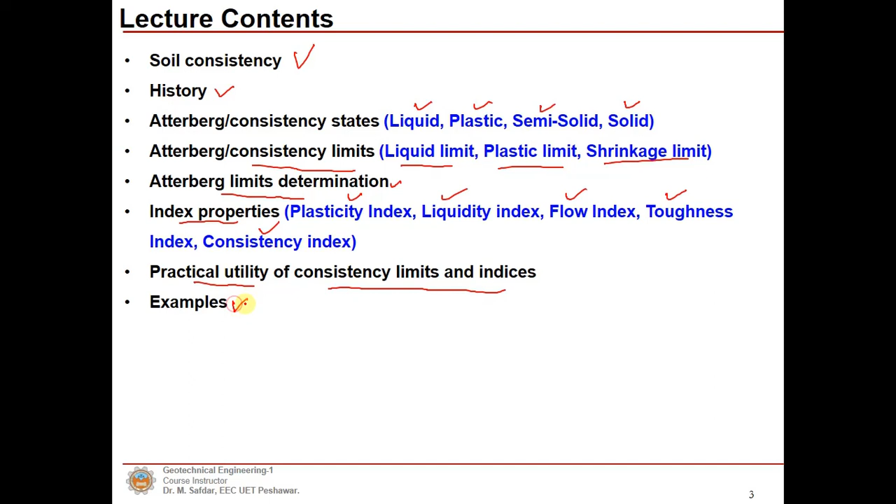We will also highlight the practical use or practical utility of those consistency limits and indices in civil engineering and in geotechnical engineering. We will solve problems and examples related to today's topic.

Now starting with the soil consistency. Soil consistency is the resistance to deformation or firmness. In simple words, we can say that a soil is very soft, firm, stiff, very stiff, or hard. Later on we will talk about the qualitative and quantitative determination of what is very soft, what is very stiff, soft, firm and hard.

We can qualitatively define these terms for fine grained soils, which is the property of soil consistency predominantly in clay soils or fine grained soils.

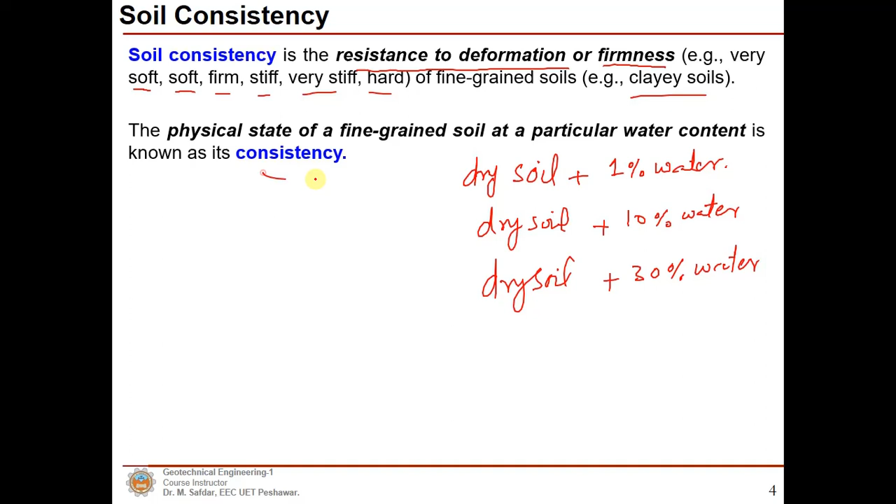Now this is the physical state of a fine grained soil at a particular water content. For example, if we have a dry soil and we add 1% of water, or if we have dry soil and we add 10% of water, or if we have dry soil and we add 30% of water, and so on, the physical state of that fine grained soil will change. That is known as consistency, and it will give plasticity to that fine grained soil as well.

Now depending upon the water content, a soil may appear in one of 4 states: liquid state, plastic state, semi-solid state and solid state.

Now if we draw the figure, on the x-axis we have the water content, and on the y-axis we have the volume. If we start from the dry soil, initially if we are changing the water content, we will reach a point that the soil will be saturated, and that limit will be known as the shrinkage limit, or SL.

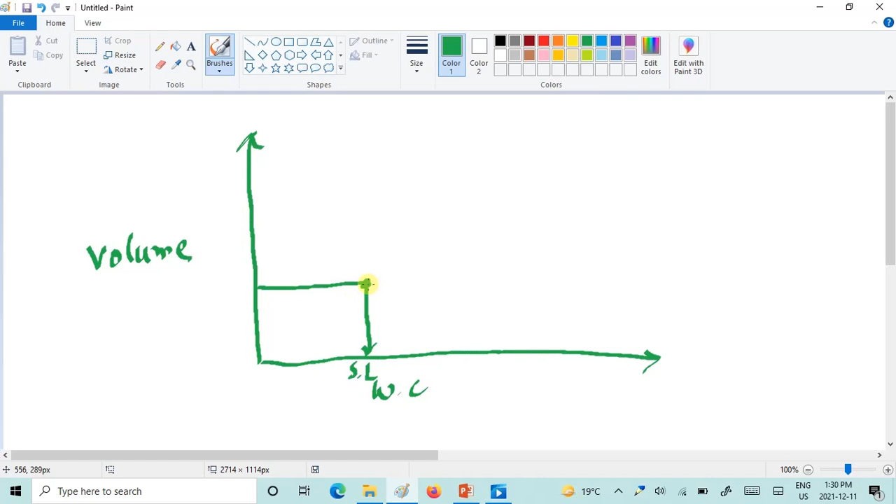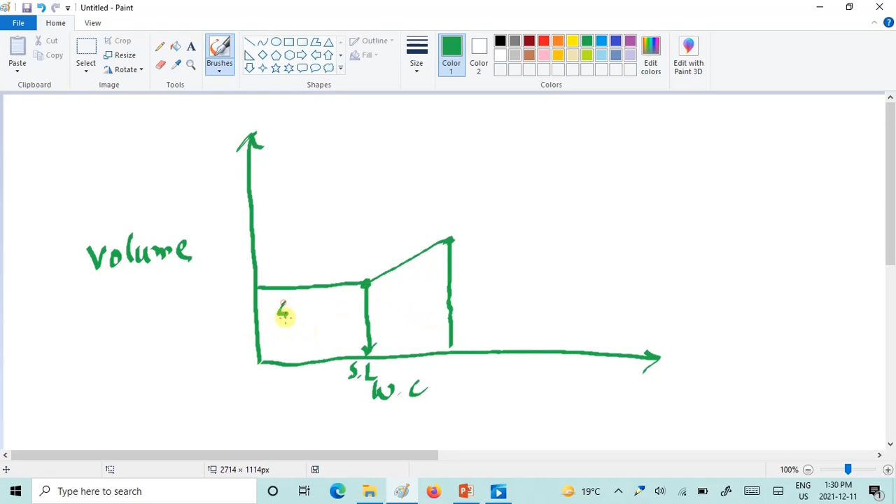Then if we increase the water content, we will reach a point - this is the solid state, this will be the semi-solid state. The soil will start to mold, and that is the start of the plastic state. This is the plastic limit. And then if you increase further water into the soil, it will behave as liquid, and this point will be known as the liquid limit.

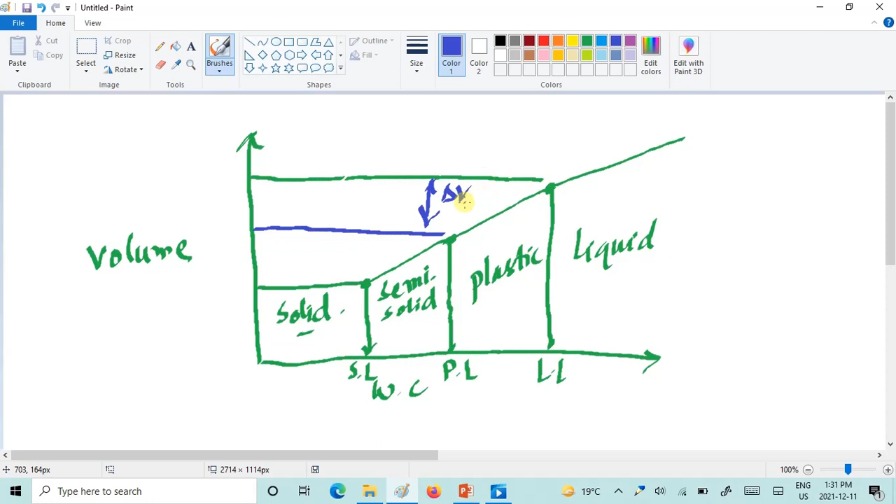Now you can see here that from this point till this point, volumetric changes are occurring, and that is due to the change in water content. So the water content is reduced from the liquid limit to the plastic limit, and the volumetric changes in that soil are occurring.

Again, the volumetric changes are occurring here as well, and that is due to the change in water content from the plastic limit to the shrinkage limit.

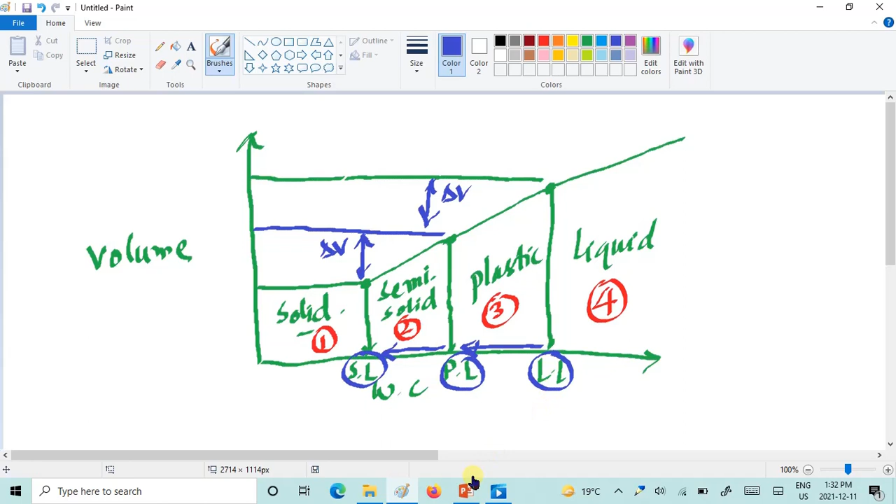So basically we have 4 consistency states and 3 consistency limits. Same explanation is provided here: solid, semi-solid, plastic and liquid states, and we have shrinkage limit, plastic limit and liquid limit.

Now in the plastic state, the soil can be molded without crumbling and rupturing. But if you're talking about the lower limit, at this particular water content, crumbling and rupturing will occur. In the middle there won't be any crumbling and rupturing of the soil. Here the soil will be kind of brittle.

Here the soil will behave plastically, and here the soil will be in liquid form. We can relate that to the strength, compressibility and permeability characteristics as well, but that will be discussed in greater detail in coming slides.

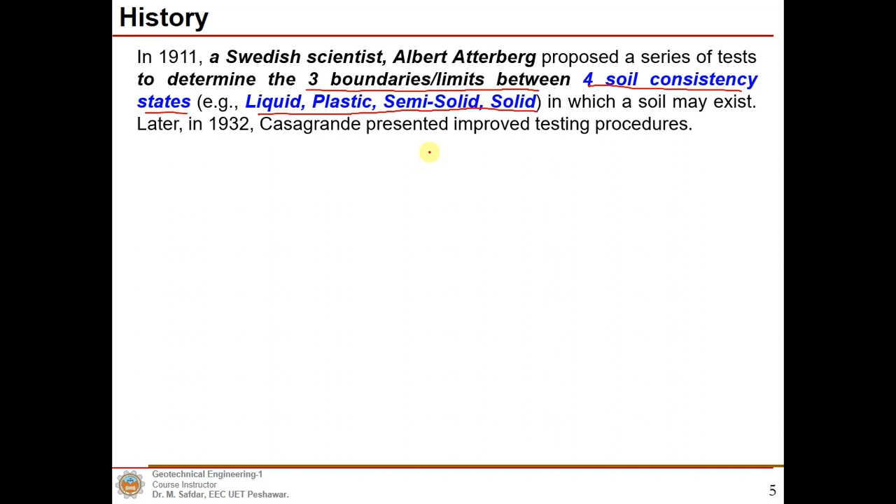Now in 1911, a Swedish scientist, Albert Atterberg, proposed a series of tests to determine the 3 boundaries, or limits, between the 4 consistency states - liquid, plastic, semi-solid and solid - in which a soil may exist. Later in 1932, Casagrande presented improved testing procedures, which will be discussed in the liquid limit determination procedures in greater detail.

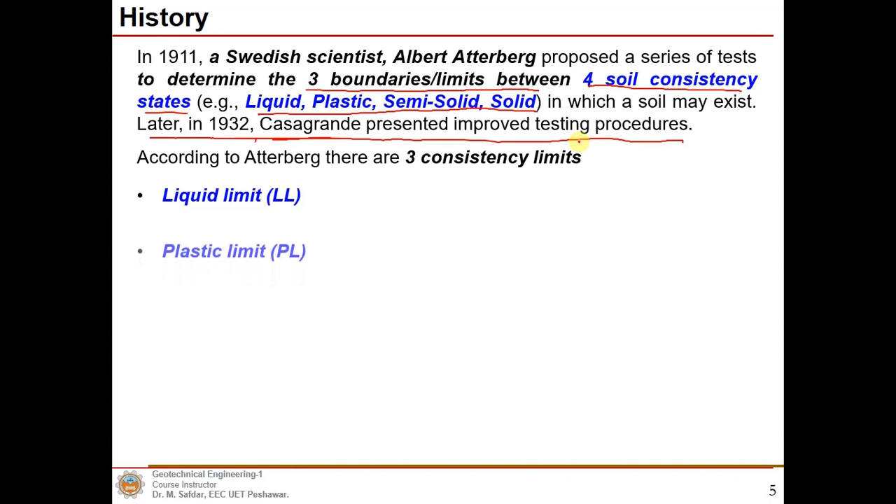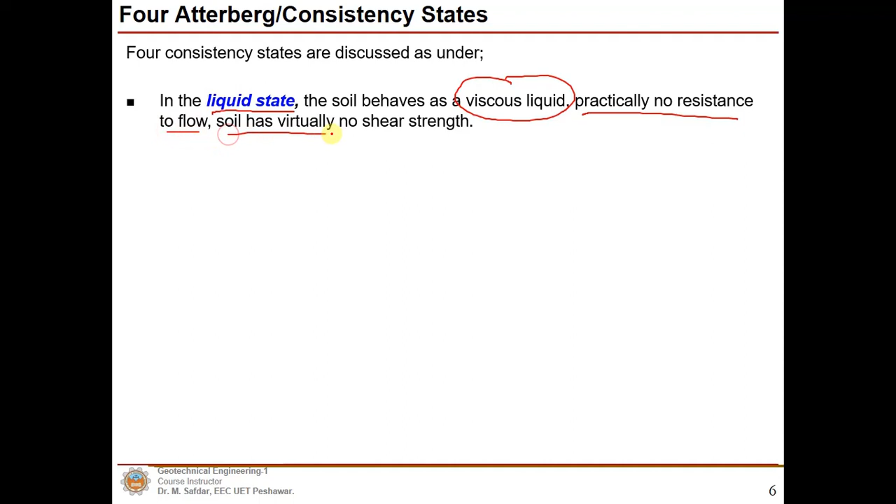Now, starting with the four consistency states, we will start with the liquid state. What are the properties of the liquid state? The soil will behave as a viscous liquid, having practically no resistance to flow, and the soil has virtually no shear strength.

In the plastic state, the soil can be molded or worked into a new shape without crumbling or rupturing. This is the stage when the soil changes from possessing practically no shear strength to having a limited shear strength. The soil water content has been reduced from the liquid state to the plastic state, and therefore the soil is gaining some strength in the plastic state.

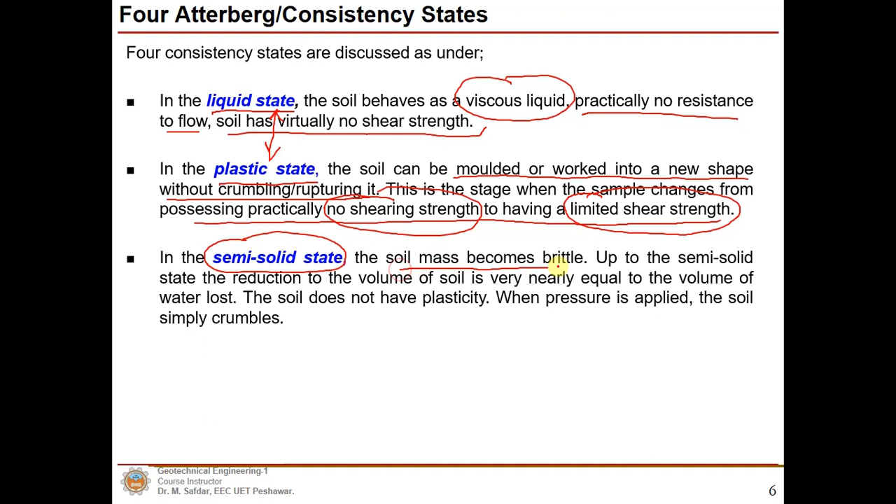Now, what should be the property of the semi-solid state? In the semi-solid state, the soil mass becomes brittle, and up to the semi-solid state, the reduction in volume of the soil is very nearly equal to the volume of water lost.

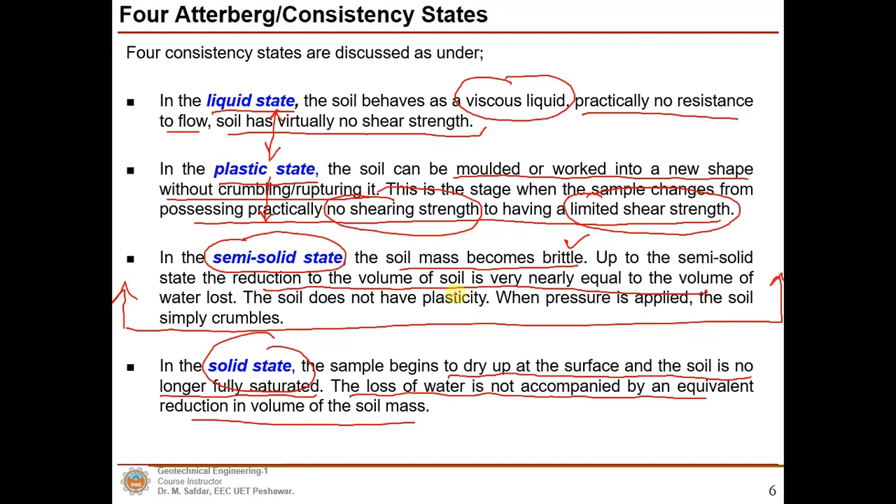The loss of water is not accompanied by volume reduction in the solid state, but till the semi-solid state—from liquid to plastic to semi-solid state—the reduction in volume was accompanied by the water lost from the soil mass.

Let's take a sample and put it into the direct shear box. First, take a sample, and second, put it into the direct shear box. Direct shear test is performed to find out the shear strength of the soil, to find out the shear strength parameters, cohesion and friction angle, which will be discussed in Geotechnical Engineering 2 in greater detail.

Now, if we put the sample from here, it will be having virtually no shear strength, when the soil won't provide any resistance.

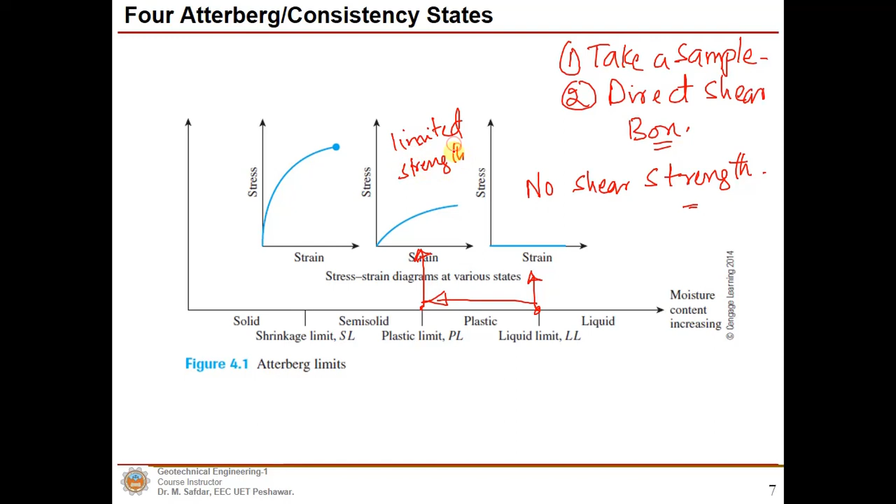However, when we take a sample from here, the water content has been reduced from the liquid limit till the plastic limit. You can clearly see that limited, or some strength can be seen in that particular soil sample.

If we take sample number 1 from here, sample number 2 from here, and sample number 3 from here, we can see that a greater strength can be obtained, or greater stress will be required to strain this particular soil.

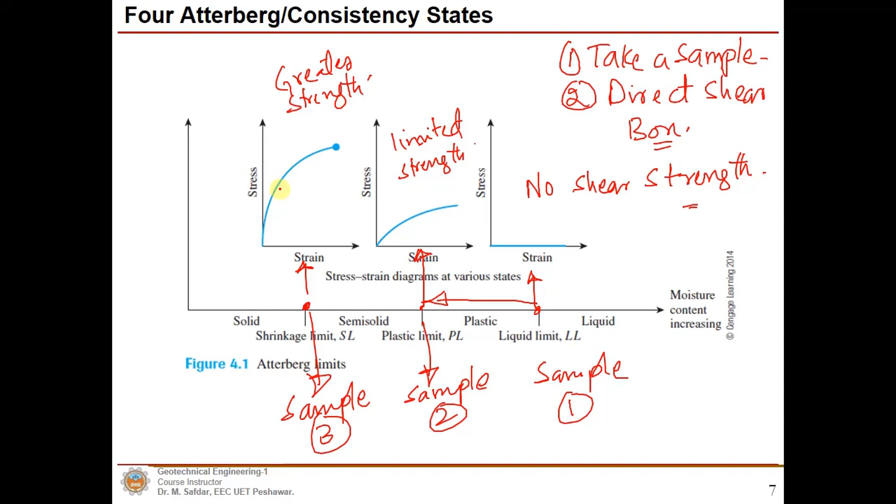If you want to make a comparison between the strain level and the stress the soil can take at that particular strain level: here, 0 kilopascal is required to strain sample number 1. If you want a number at 1% axial strain, the stress needed to strain sample number 2 till 1% is approximately 10 kilopascal.

But for sample number 3, taken at the shrinkage limit of that particular soil, in order to strain that soil sample till 1%, we need to apply approximately 30 kilopascal. Now from 0 to 10 kilopascal and from 10 to 30 kilopascal, we can clearly see that by changing the water content, we can see different types of behavior from the soil.

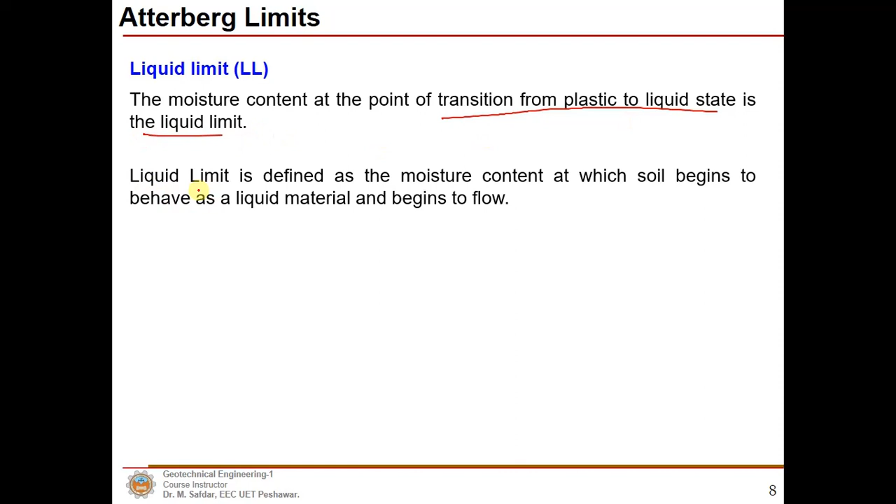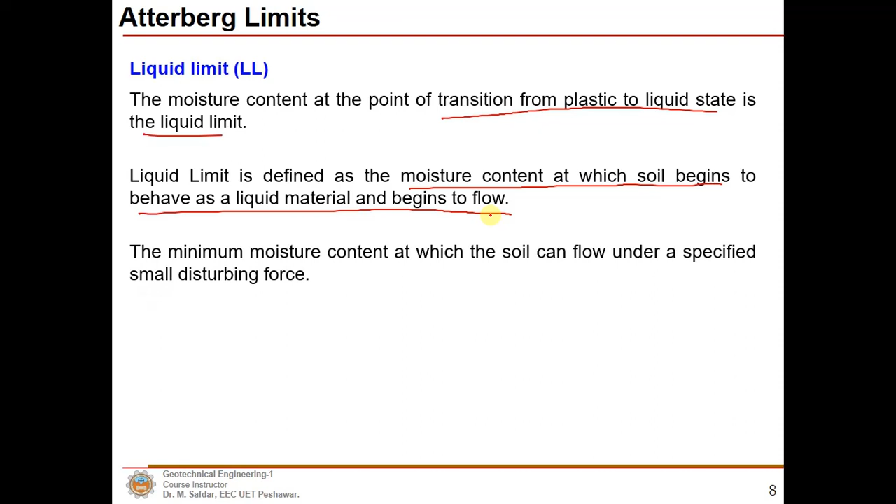Now, the moisture content at the point of transition from plastic to liquid state is the liquid limit, or the liquid limit is defined as the moisture content at which soil begins to behave as a liquid material or begins to flow—the minimum moisture content at which the soil can flow under a specified small disturbing force.

No force or stress is required to strain the specimen obtained from sample number 1. The moisture content at the point of transition from semi-solid to plastic state is the plastic limit.

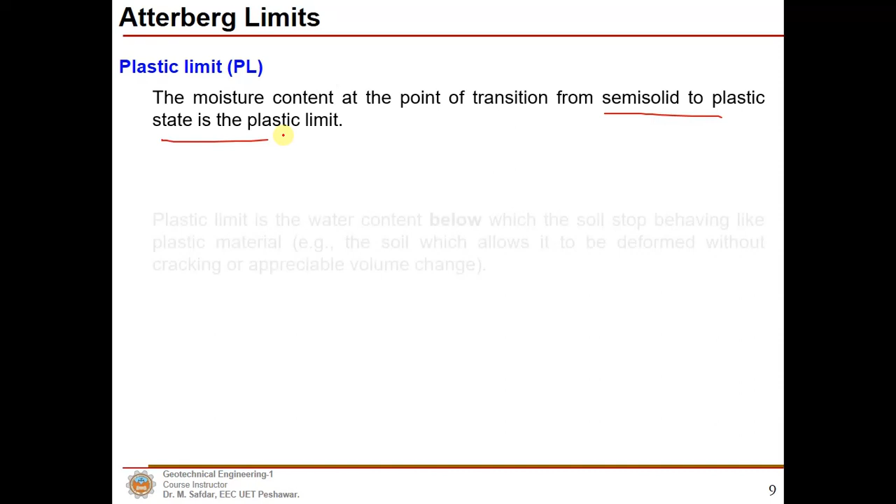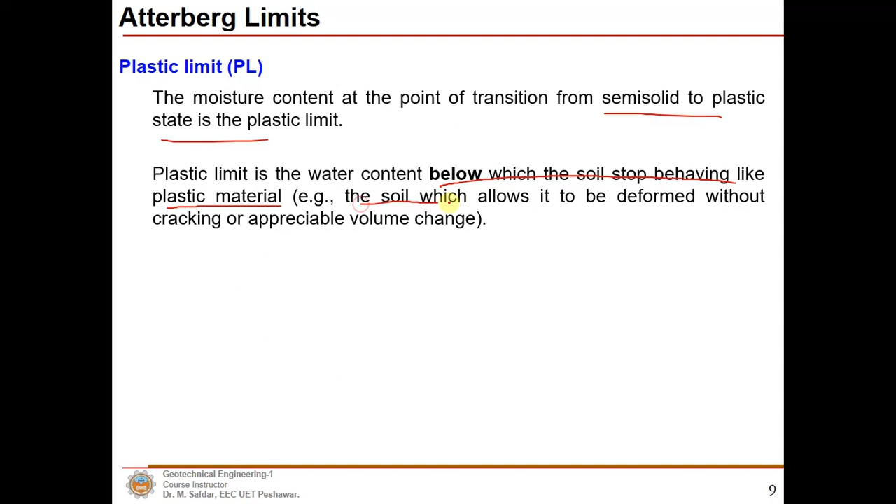Plastic limit can also be defined as the water content below which the soil stops behaving like a plastic material. You can mold the specimen when you add water content into the soil, but there is a limit that the soil can be molded, and the soil which allows it to be deformed without cracking or appreciable volumetric changes is known as the plastic material.

The minimum moisture content at which the soil can be rolled into a thread approximately 3.2 mm in diameter without crumbling and rupture - this will be explained in plastic limit determination, so for plastic limit determination, we are preparing a thread.

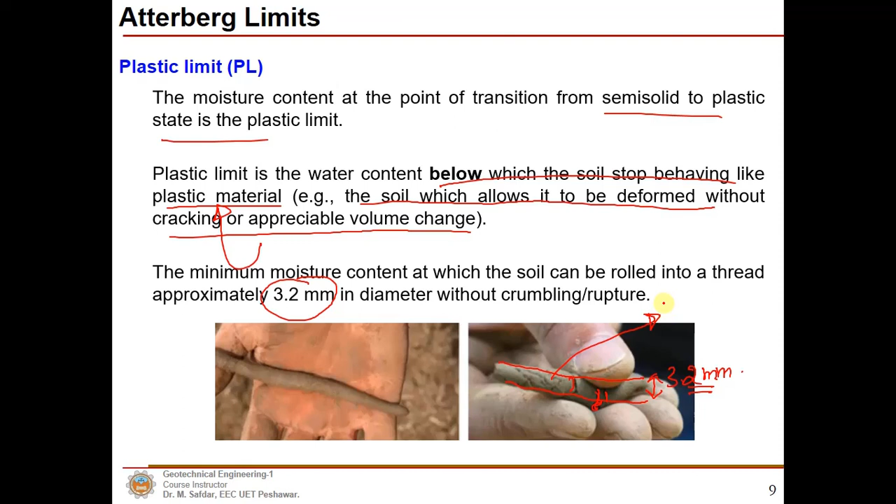When you see cracks building up in your fingers, and the diameter of this thread is 3.2 millimeter, the moisture content or water content reading at this particular point is known as the plastic limit.

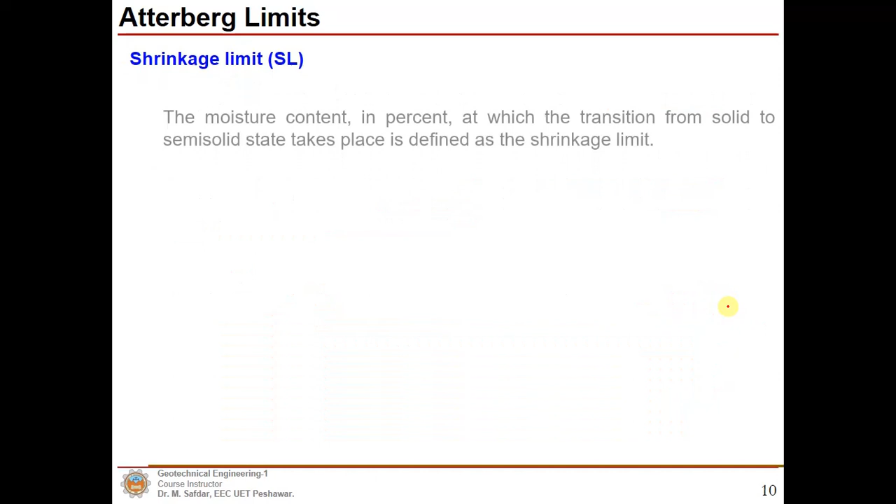Now, what is shrinkage limit? The moisture content in percentage at which the transition from solid to semi-solid state takes place is defined as the shrinkage limit.

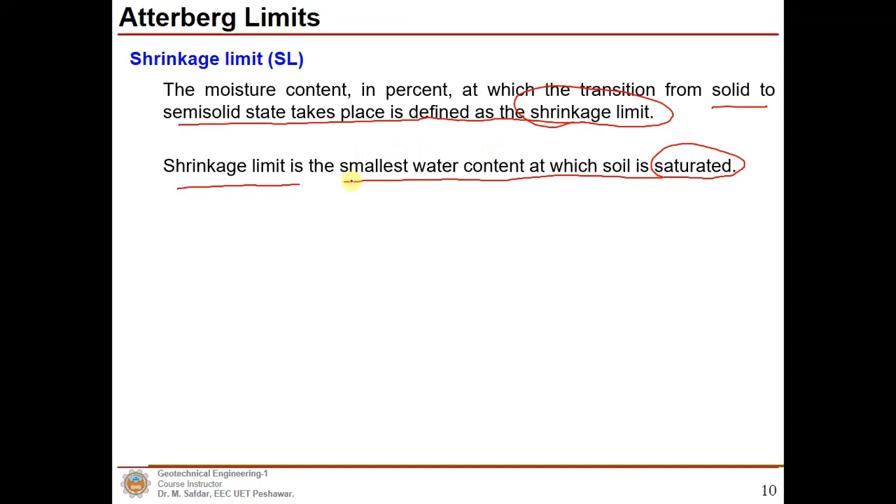We can also define the shrinkage limit as the smallest water content at which the soil is saturated - it means that all the voids are filled with water. Also, it is the maximum water content below which the soil ceases to decrease in volume on further drying.

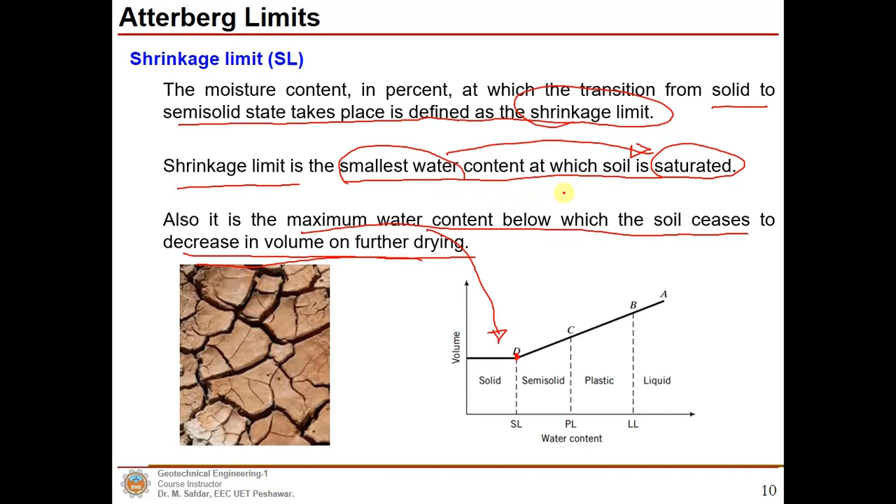Maximum water content below which the soil ceases to decrease in volume on further drying - so this is the point. Maximum water content or the smallest water content at which the soil is saturated.

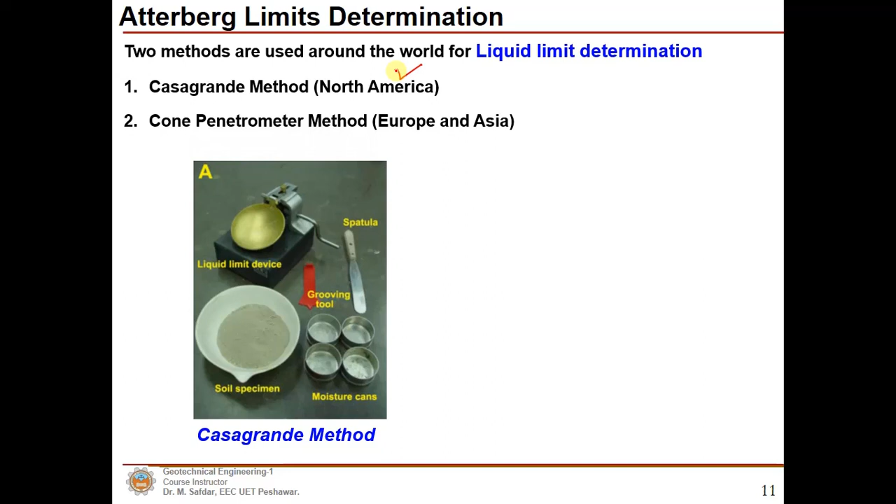Two methods are used around the world for liquid limit determination. First one is the Casagrande method, which is basically used predominantly in North America. There's a cone penetrometer method which is used in Europe and Asia.

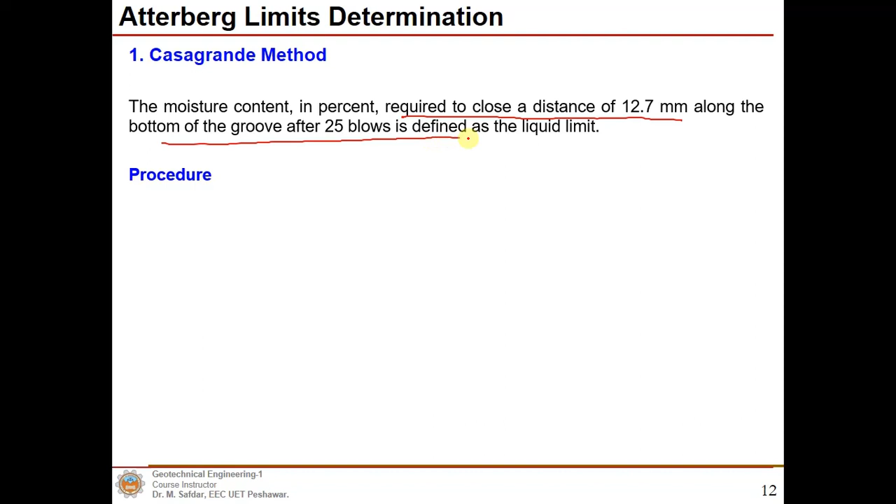In the Casagrande method, the moisture content in percentage is found out. We need to close a distance of approximately 13 millimeter, or 12.7 millimeter, along the bottom of the groove. After 25 blows is defined as the liquid limit, but it's difficult to obtain 25 blows in the first attempt - we need to perform a few trials.

So we first spray the soil sample with distilled water, then place soil paste in the brass cup. The groove is then cut at the center of the soil pad with the standard grooving tool. The cup is lifted and dropped from a height of 10 millimeter at 2 drops per second. Number of blows to close the groove of 12.7 millimeter are counted.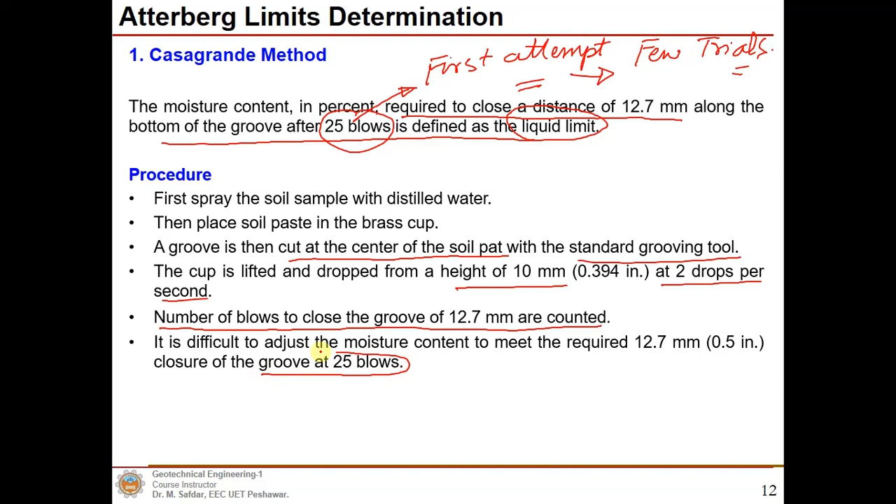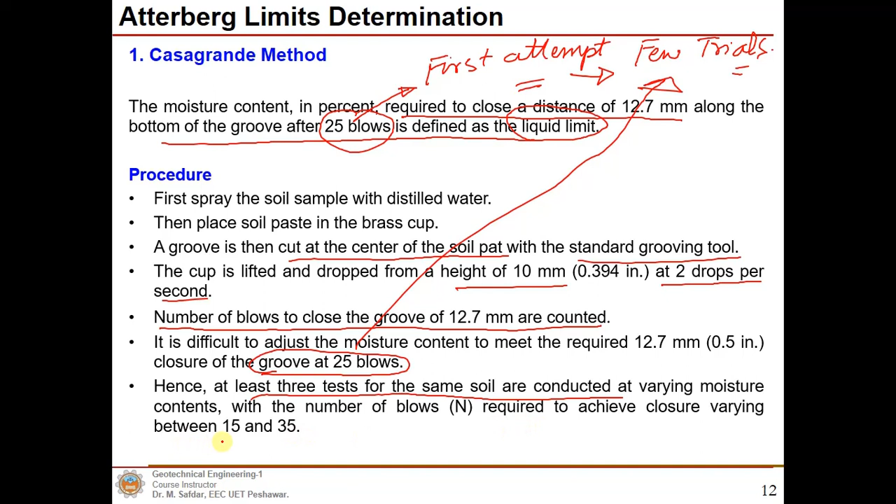So we need to record the number of blows, and we already know it's difficult to adjust the moisture content to meet the required closure of the groove at 25 blows, so we need to perform a few trials. At least 3 tests for the same soil are conducted at varying moisture contents, with the number of blows required to achieve closure varying between 15 till 35 blows.

Now during the test we might face two conditions. One condition might be that if the number of blows is greater than 35, we need to remix the entire soil and add distilled water to increase the moisture content so that the number of drops required to meet the groove decreases.

Now if the number of blows are less than 15, then we need to add dry soil to it to decrease the water content, and standard reference ASTM D4318 for standard test methods for liquid limit can be used.

Here are the accessories and apparatus required: liquid limit device or Casagrande apparatus, soil specimen, grooving tool, spatula, and moisture cans to find out the moisture content.

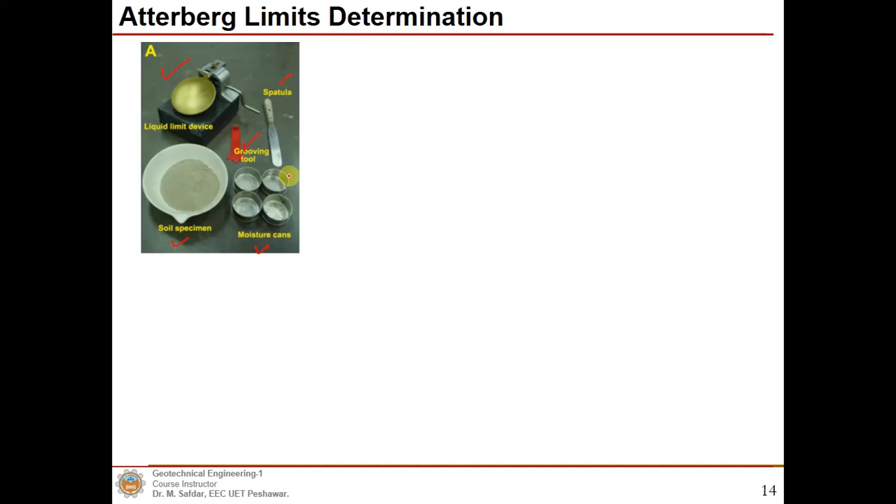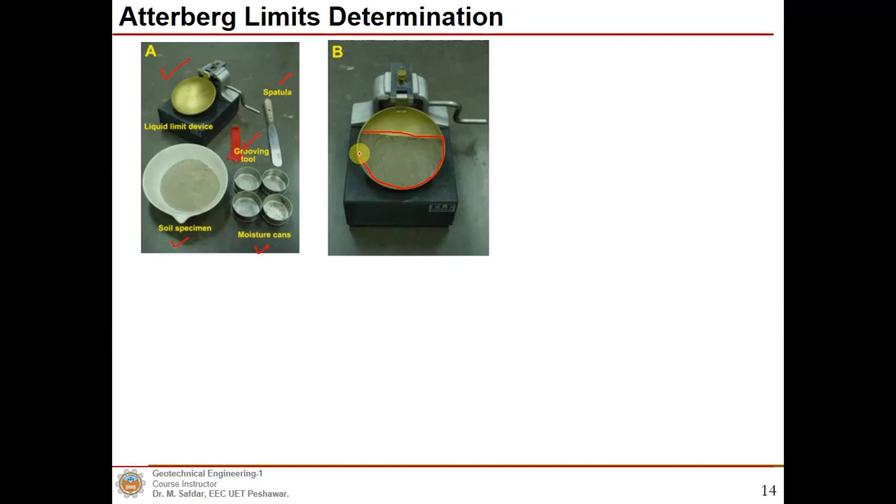So first you need to place the soil paste in the brass cup, then you make a groove in the middle, then you apply blows using this handle, and you need to find out the closure here, which should be approximately 13 millimeter or 12.7 millimeter. There are two types of grooving tools used: Casagrande grooving tool and alternative grooving tool.

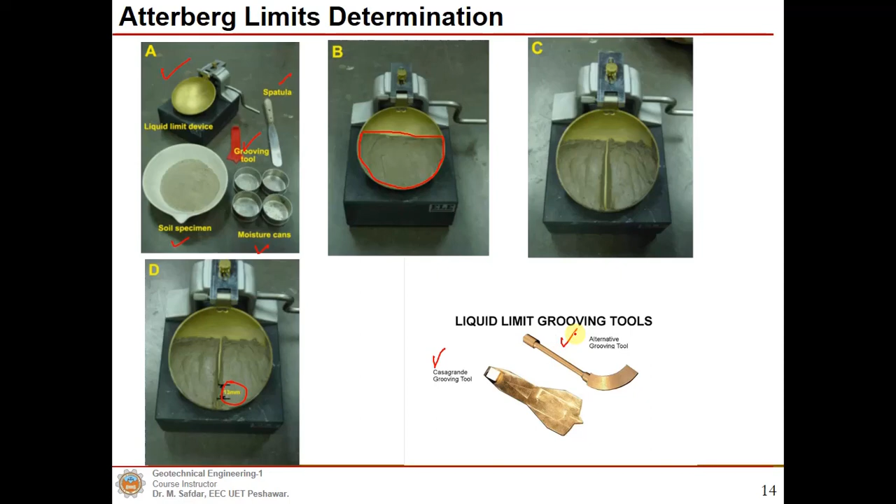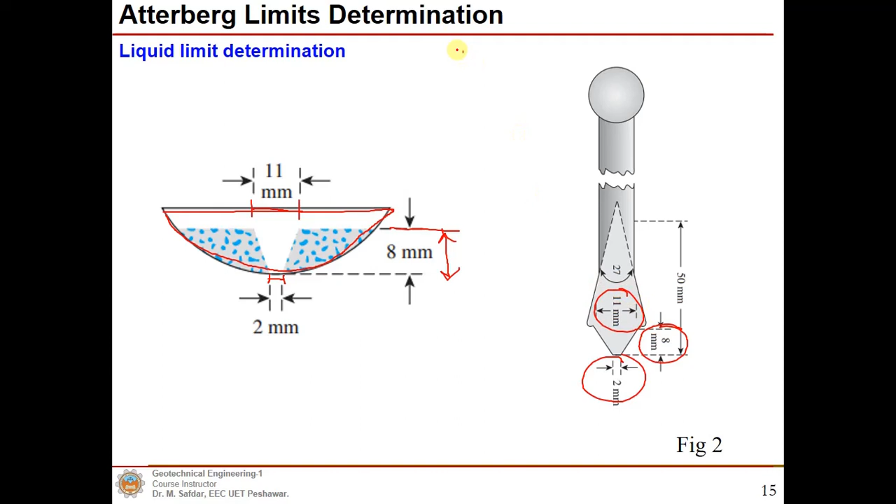Here, this is the brass cup. The height of the soil paste should be 8 millimeter. At the top, the opening should be 11 millimeter. At the bottom, the groove opening should be 2 millimeter, and those dimensions are also given here using the Casagrande grooving tool.

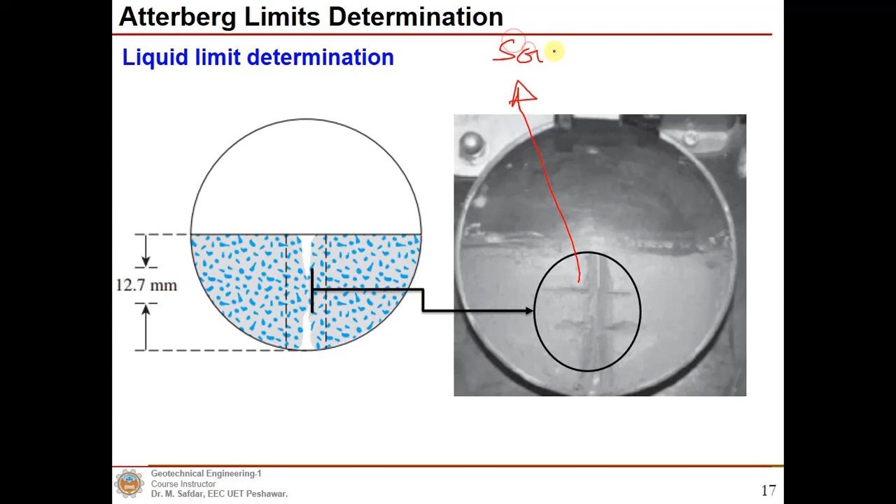You make a groove here, then you apply the number of blows until closure reaches 12.7 millimeter or approximately 13 millimeter, and you take the soil sample in a moisture can from here.

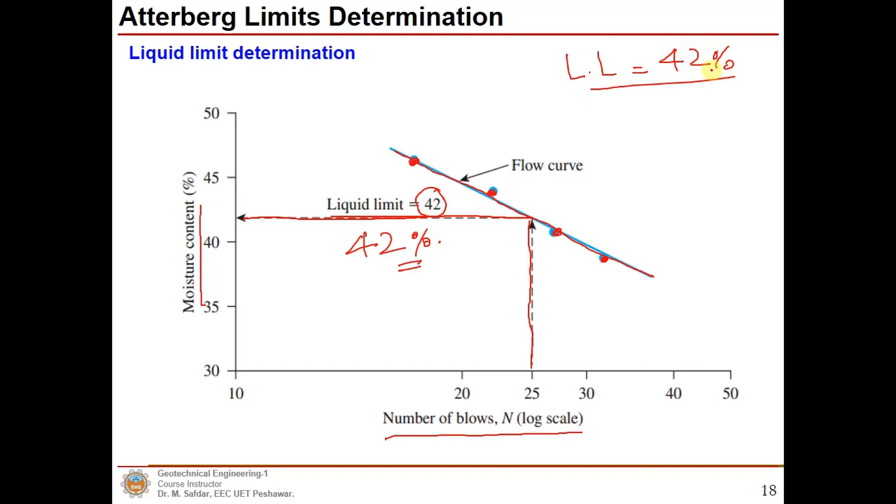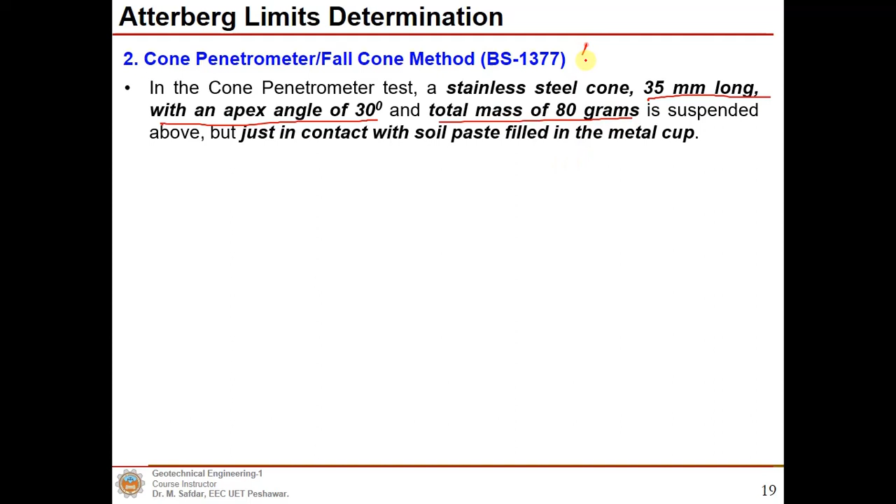Now there is another method, the cone penetrometer method or fall cone method, and the British standard for that is also given, BS 1377. In the cone penetrometer test, a stainless steel cone 35 millimeter long with an apex angle of 30 degrees and total mass of 80 grams, or weight equal to 0.78 Newton, is suspended above but just in contact with soil paste filled in the metal cup.

Now the cone is permitted to fall freely for a period of 5 seconds. The penetration of the cone at varying moisture content is noted. The range is also given, which is 15 to 35 millimeter.

Now the moisture content, this is important. The moisture content at 20 millimeter penetration is termed the cone penetration limit, which for practical purposes is the same as the liquid limit obtained by the Casagrande method for n equal to 25 blows. Our number of blows is 25, but in the cone penetrometer or fall cone method it's 20 millimeter. Very important.

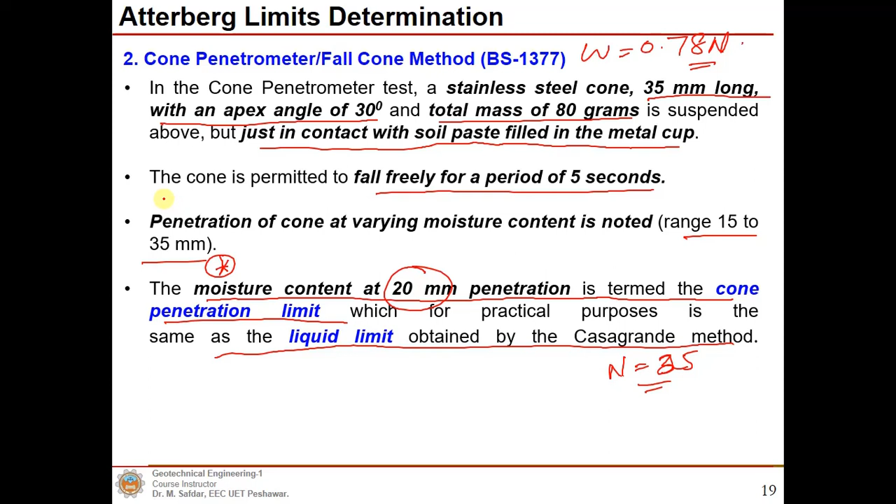Then you plot the penetration in millimeter and moisture content in percentage. For 20 millimeter penetration, you find out the moisture content required, and that is known as the liquid limit. These are the data points from the number of trials you made, and then you draw this line using Excel, the best fit line, and for 20 millimeter you find the corresponding moisture content.

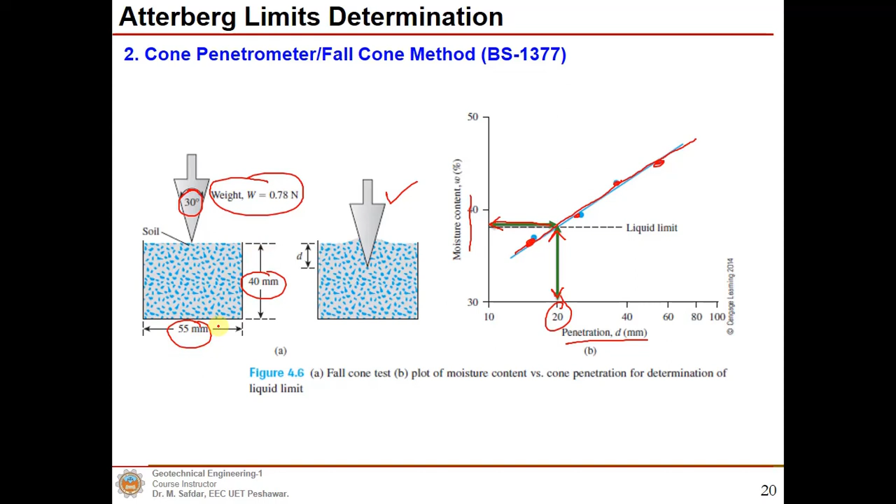Cone and the weight of the cone, the apex angle of the cone is 30 degrees. Dimensions of the samples are also given. Now we find out the liquid limit.

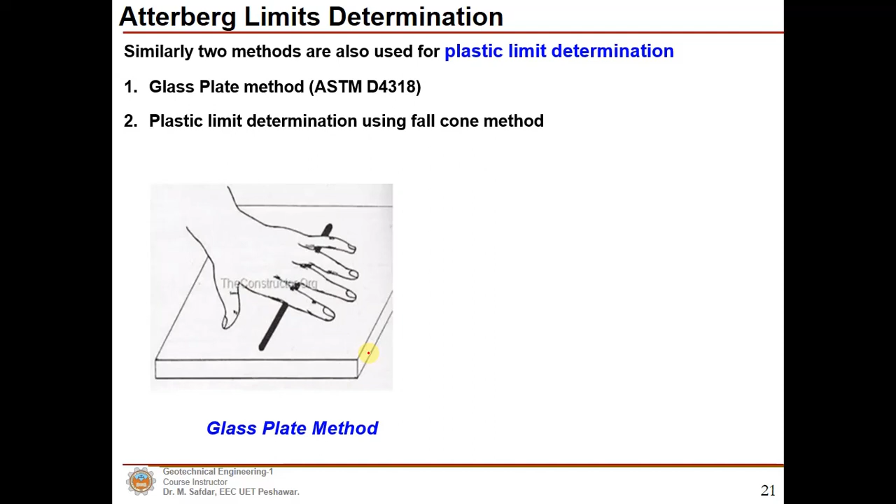Now it's time to find out the plastic limit of the soil. Similarly, two methods are used for plastic limit determination. One is the ASTM D4318 method, the glass plate method. The other is plastic limit determination using the fall cone method.

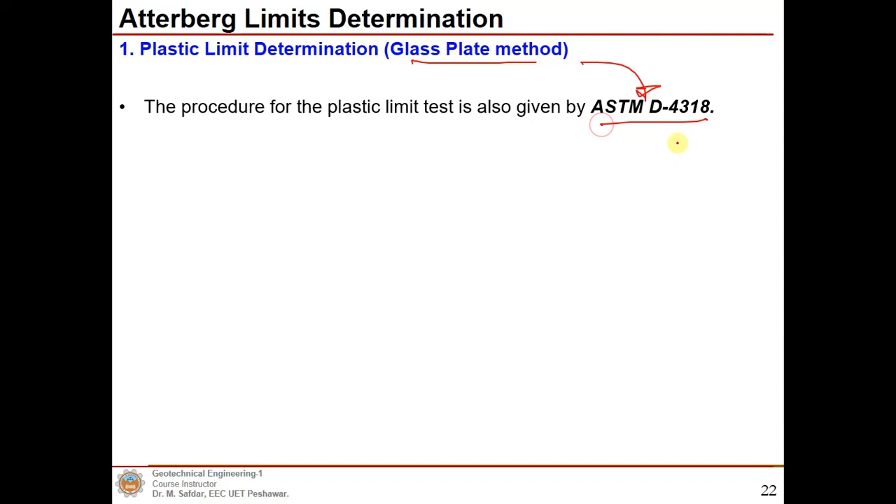The procedure for the plastic limit test using the glass plate method is explained in greater detail in ASTM D4318, where you take a small quantity of soil, 15 to 20 grams, mixed with water. The soil paste is shaped into a ball, rolled into a thread on a glass plate with fingertips. The moisture of the threads is so adjusted that threads start just crumbling, cracking, rupturing at a particular diameter of 3.2, or approximately 3 millimeter.

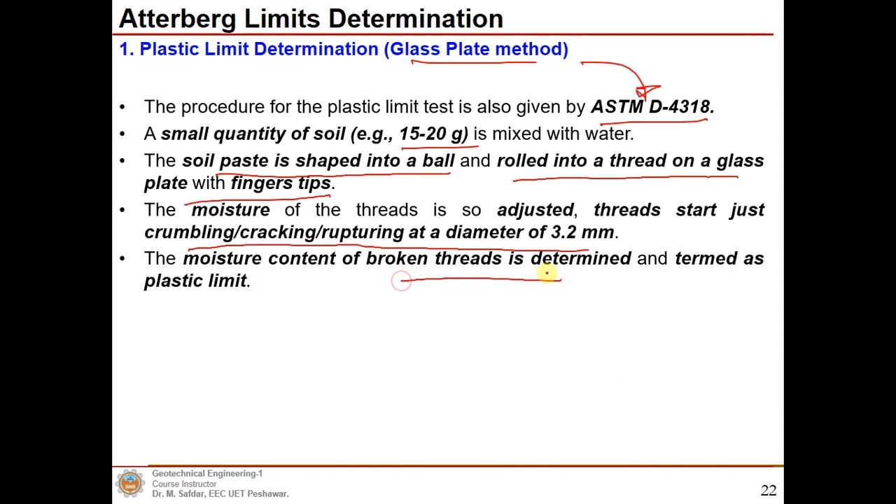The moisture content of the broken threads is determined and termed as the plastic limit. So you use your hand and fingers.

The procedure is given in these figures as well, using certain accessories: glass plate, spatula, moisture cans, soil specimen, porcelain dish as well. You make an ellipsoidal soil mass and then roll it using your fingers, and when they start crumbling at the diameter of 3.2 millimeter, that water content is known as the plastic limit of that soil.

This is the minimum water content. Till that water content you can easily mold your specimen, and the soil can be molded at this particular water content.

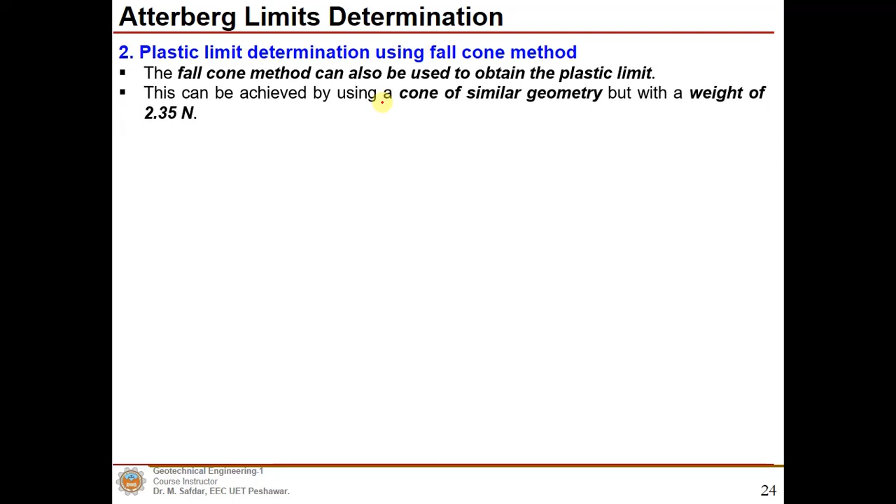Now we can also find out the plastic limit using the fall cone method, but you need to use a slightly heavier cone of 2.35 Newton. 3 to 4 tests at varying moisture contents of the soil are conducted, and the corresponding cone penetrations, D in millimeters, are determined. The moisture content corresponding to a cone penetration of D equal to 20 millimeter is the plastic limit.

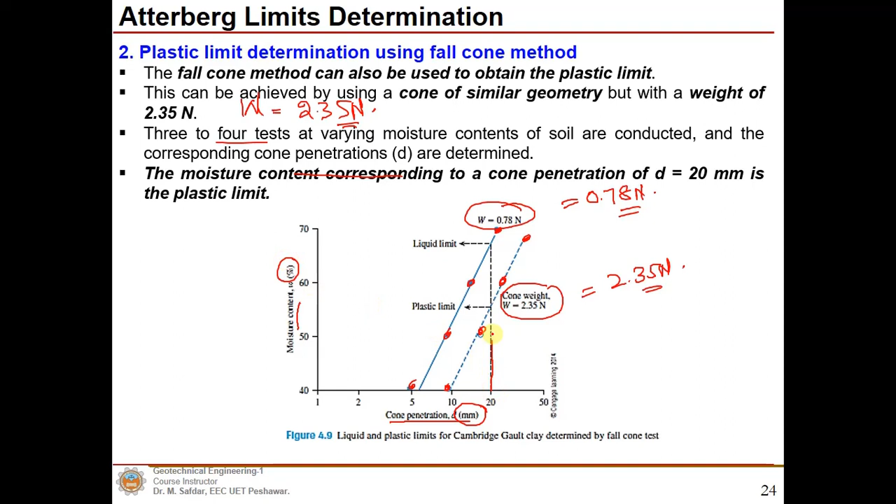Now you perform 4 tests for the liquid limit determination, and the weight of the cone was 0.78 Newton. Then you used a slightly heavier cone, which is 2.35 Newton, and you plotted the cone penetration in millimeters and moisture content in percentage, then found the corresponding moisture content for both these cones.

Now the moisture content for the lighter cone will be approximately 67%, the liquid limit in this case, and approximately here we will be having the plastic limit, 55. I would call that 55% as the plastic limit of this particular soil, the Cambridge gault clay, determined by the fall cone test.

Now there is another limit, the shrinkage limit. The shrinkage limit test is performed per ASTM D4943, using a porcelain dish about 44 mm in diameter and about 12.7 mm height.

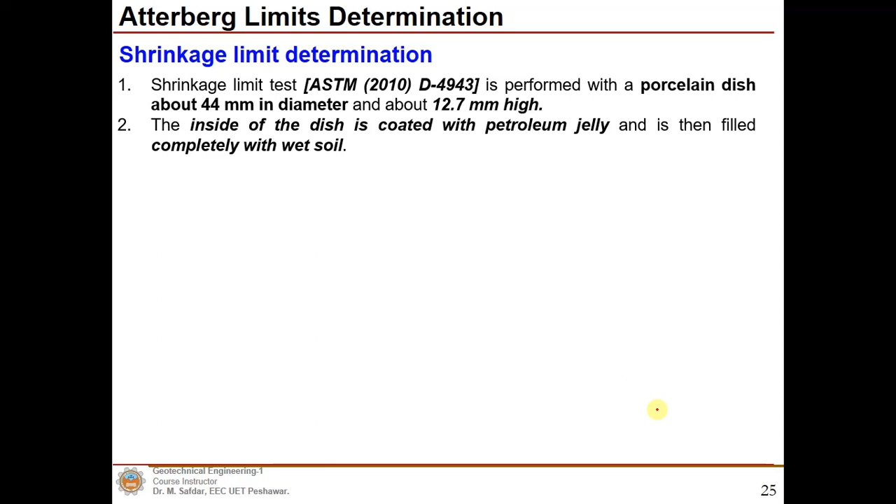The inside of the dish is coated with petroleum jelly and is then filled completely with wet soil. The excess soil standing above the edge of the dish is struck off with a straight edge. The mass of the wet soil inside the dish is recorded.

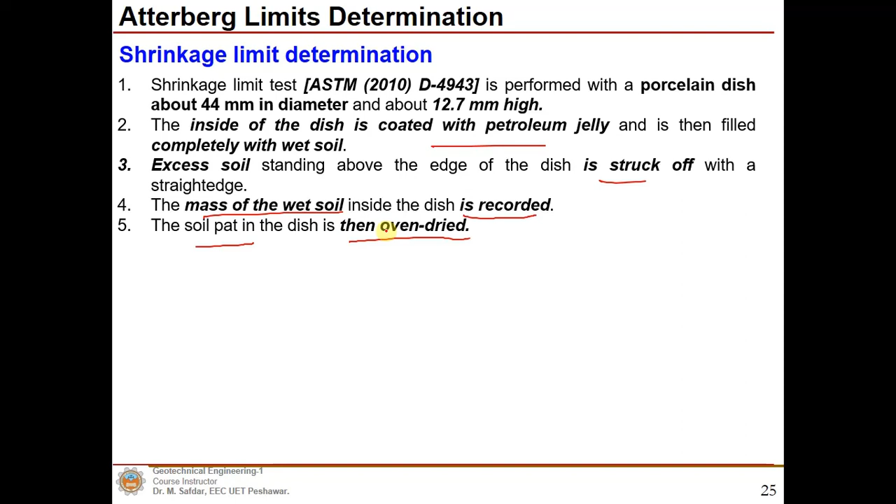The soil pat in the dish is then oven dried and the volume of the oven dried soil pat is determined using mercury. You place it in a porcelain dish where the mercury is there, and then you put that dry pat into it, and the displaced volume of the mercury will give us the volume of the dry soil pat. M1 is the mass of the soil in wet state and volume of the soil in wet condition, mass of the soil in dry state and volume of the soil in dry condition is noted down.

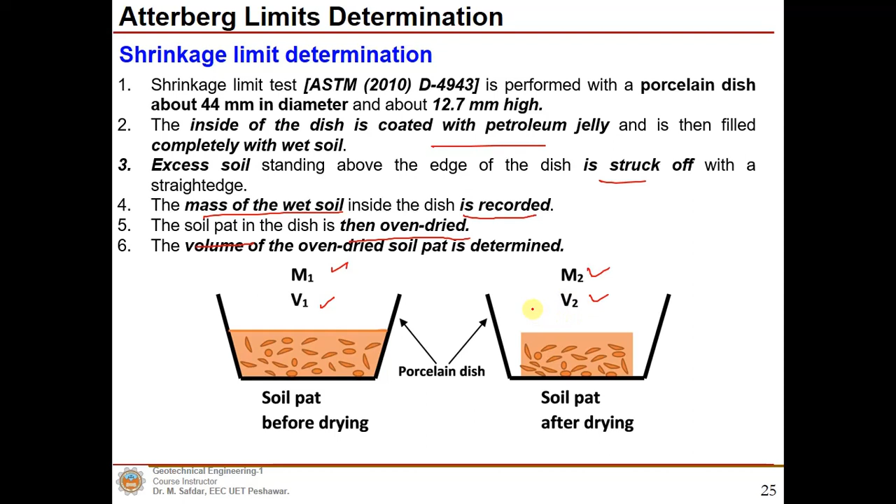Then you need to use this equation for the shrinkage limit, SL, which equals M1 minus M2 divided by M2, into 100, minus VI, where VI is the initial volume of the wet soil, that is the inside volume of the dish. VF is the volume of the oven dried soil pat in cubic centimeter.

What is rho W? Rho W is the density of water in gram per cubic centimeter, which is usually equal to 1.

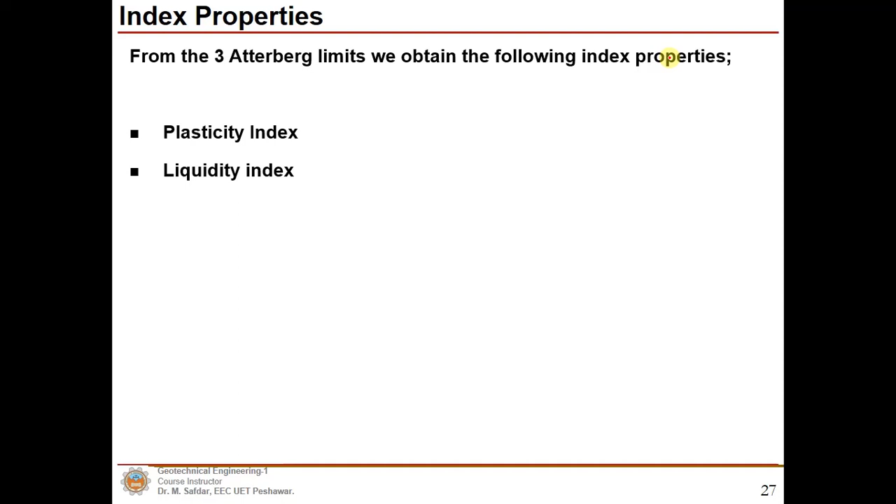Now from these three Atterberg limits we can obtain the following index properties, such as plasticity index, liquidity index, flow index, toughness index, and the consistency index.

Now the plasticity index is the difference between the liquid limit and PL, the plastic limit. So if liquid limit is greater than the plastic limit, we will get a value, and if liquid limit is equal to the plastic limit, PI is equal to 0, and if PI is 0, that soil is non-plastic.

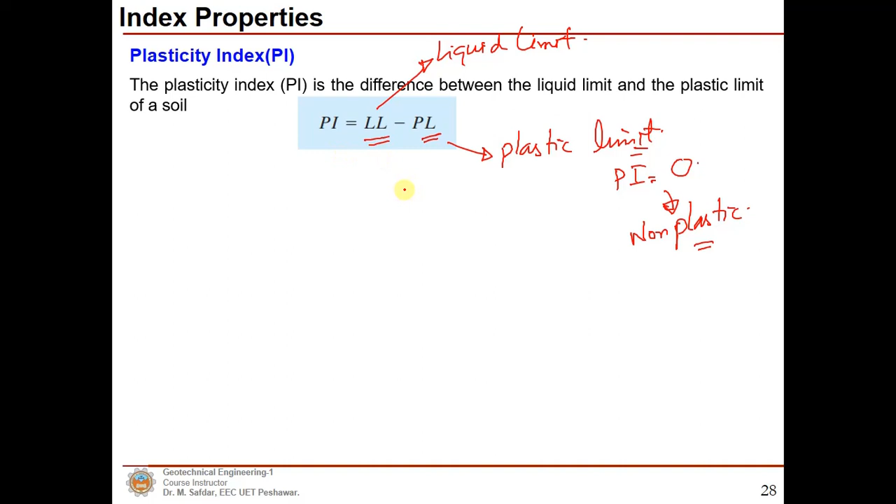And if we are having a greater plasticity index, it means that the soil will be having plasticity. Plasticity index is important in classifying fine grained soil, and the greater the PI, the greater the soil compressibility. So if we are having greater PI, that particular fine grained soil will have greater compressibility and greater settlement.

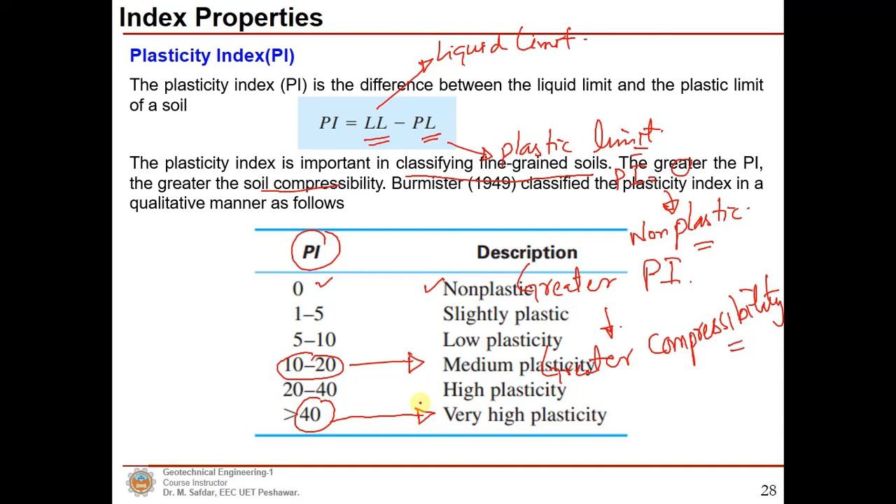Now a qualitative description would be something like this: if you are having 0 PI, that would be non-plastic. If you are having 15 PI, then it will be medium plasticity, and if you are having PI value greater than 40, it will be having very high plasticity, and that particular fine grained soil will be having greater compressibility. Now there is another index property known as the liquidity index.

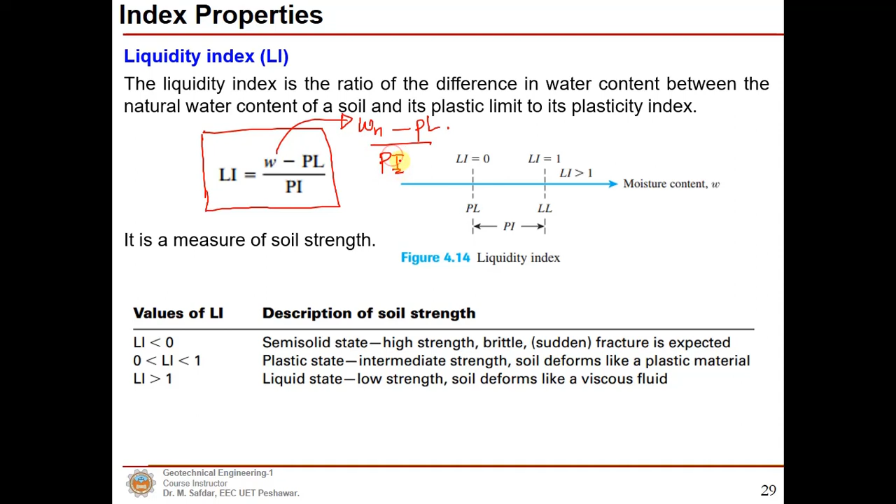The liquidity index can be found using this equation, where W is the natural water content minus plastic limit, divided by the plasticity index. We already know plasticity index is liquid limit minus plastic limit, and W is the natural water content. Plastic limit we usually find out by making that 3.2 millimeter thread.

So at plastic limit, liquidity index is equal to 0. At liquid limit, liquidity index is equal to 1, and if liquidity index is greater than 1, the soil will be in the liquid state. We can also make a qualitative description: if liquidity index is less than 0, we are having a semi-solid state. If liquidity index is in between 0 to 1, that would be a plastic state. This plastic state will have intermediate strength, and the semi-solid state will have high strength. The liquid state will have low strength, and the soil deforms like a viscous fluid.

Now the slope of the flow curve is called the flow index. If you remember, we performed 4 tests to find out the liquid limit, and then we plotted those 4 points and the best fit line. This is known as the flow curve. Now the slope of this flow curve is known as the flow index.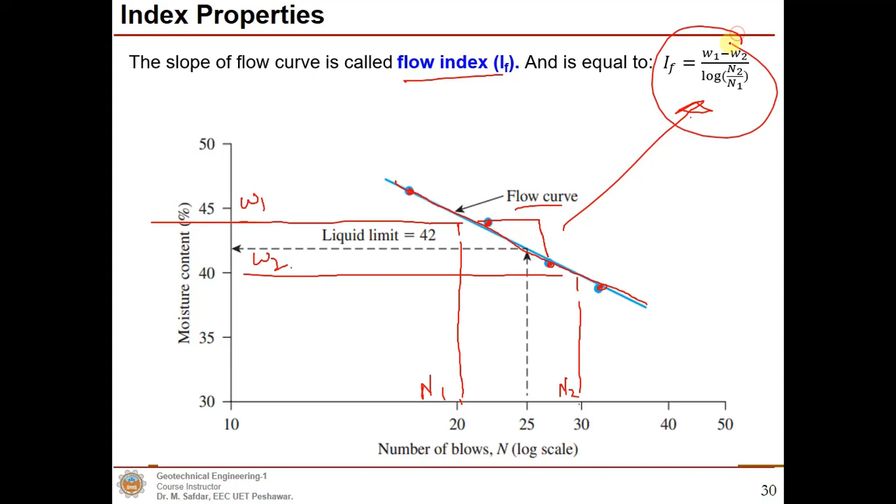For example, if we want to find out the slope of this flow curve, this would be N1, N2, W1 and W2, and if you use this equation, you can easily find out the flow index.

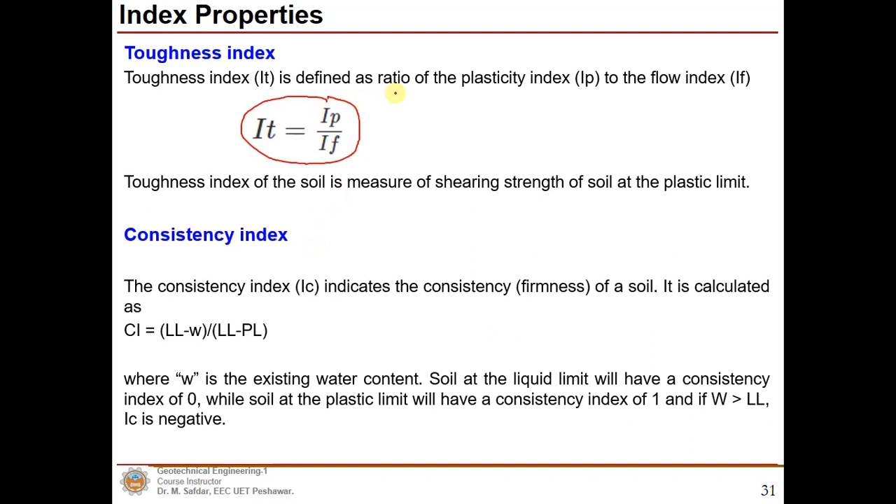Similarly, there are other index properties as well, which you can relate to the strength and compressibility characteristics of the soil. For example, the toughness index is the ratio of the plasticity index to the flow index, and the consistency index is the liquid limit minus the natural water content, divided by the liquid limit minus plastic limit.

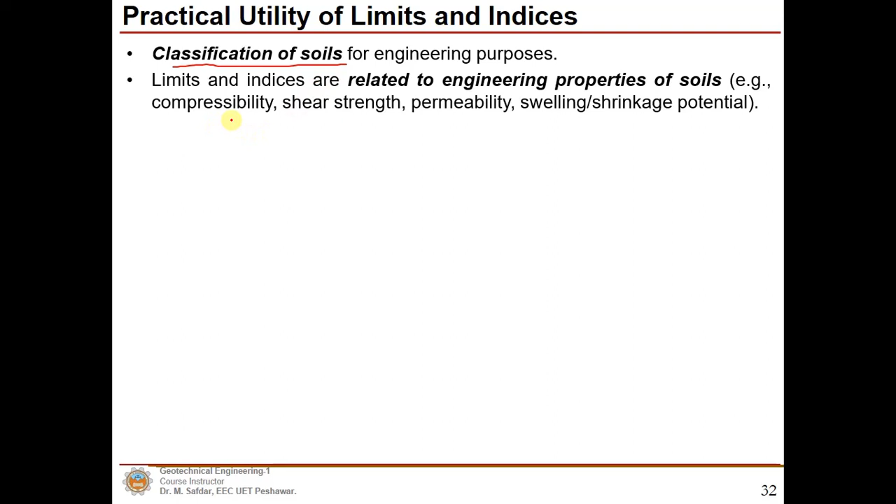So these are different indices which are useful for classification of the soils for engineering purposes, and these limits and indices are also related to the engineering properties of the soil, such as strength, compressibility, swelling and shrinkage potential.

So that's the qualitative determination. Now let's have the quantitative determination. For example, for a very soft soil, the undrained shear strength of the soil, if you are finding it from the unconfined compression test, will be less than 12, and the standard penetration test value will be less than 2.

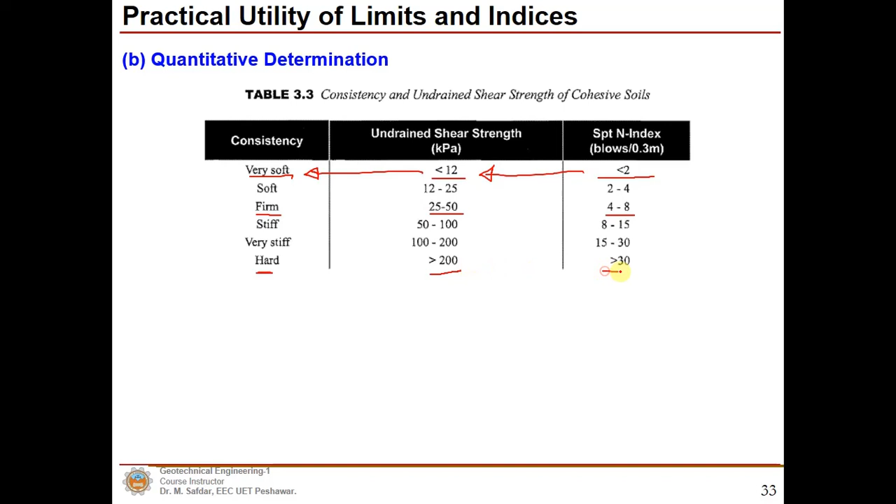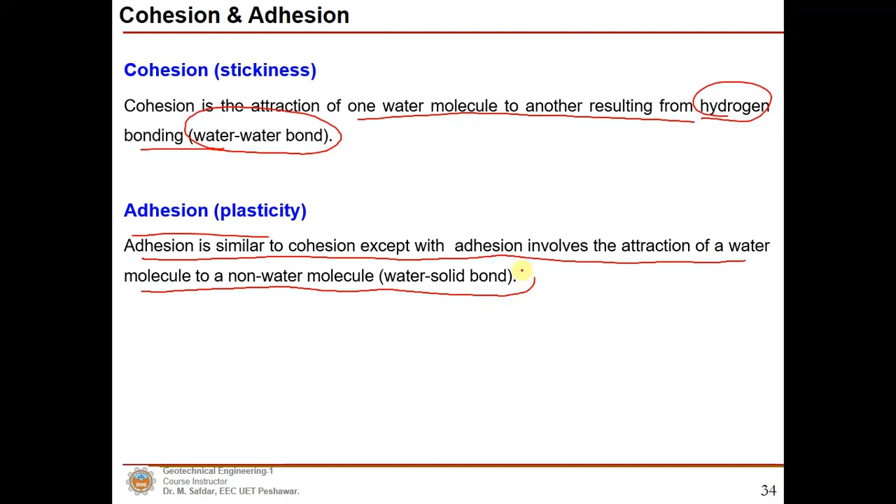Cohesion is the attraction of one water molecule to another resulting from hydrogen bonding, which we can call a water-to-water bond. Adhesion, which adds plasticity, is similar to cohesion, except it involves the attraction of a water molecule to a non-water molecule, or a water-to-solid bond, which gives plasticity to fine-grained soil.

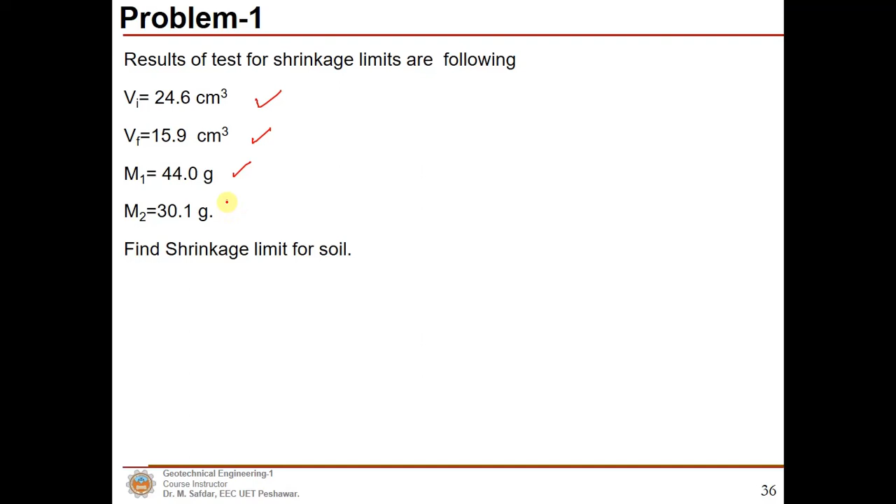Now let's solve a few easy problems related to the shrinkage limit. For example, the initial volume is given, the final volume is given, the mass of the wet soil is given, and the mass of the dried soil is given. We need to find out the shrinkage limit.

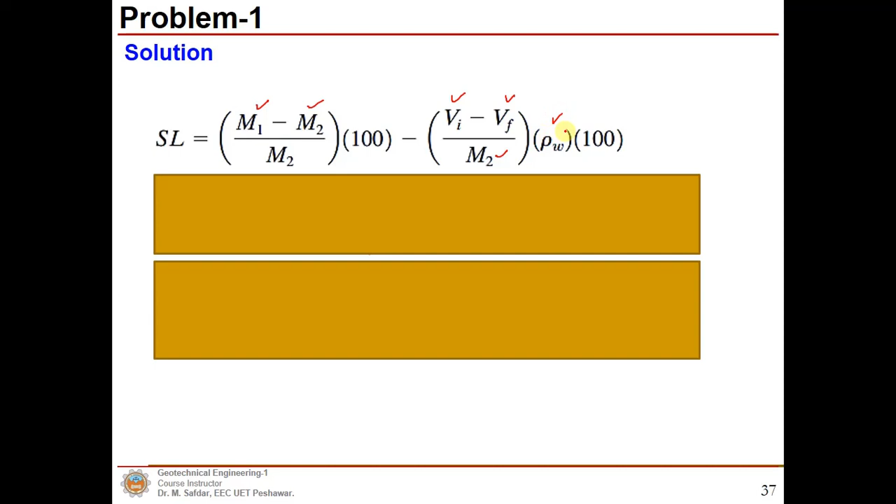We already know the equation for the shrinkage limit: m1, the wet mass, minus m2, the dried mass, divided by the dried mass, into 100. Vi is the initial volume of the wet soil, Vf is the final volume of the dried soil, and the mass of the dried soil times the density of water, which is 1 gram per cubic centimeter, into 100. The given data is known, so if we put those values into this equation...

...we find that the shrinkage limit is 17.2%. This means at 17.2% the soil is saturated, or the voids are filled with water. We can also say that 17.2% is the maximum water content that won't cause any volumetric changes. With further drying, whether at 5%, 10%, or 17.2%, volumetric changes won't occur in this particular soil. So this is the maximum water content in the soil, such that reducing moisture content further, the volumetric changes between 0 and 17.2% won't be different, theoretically.

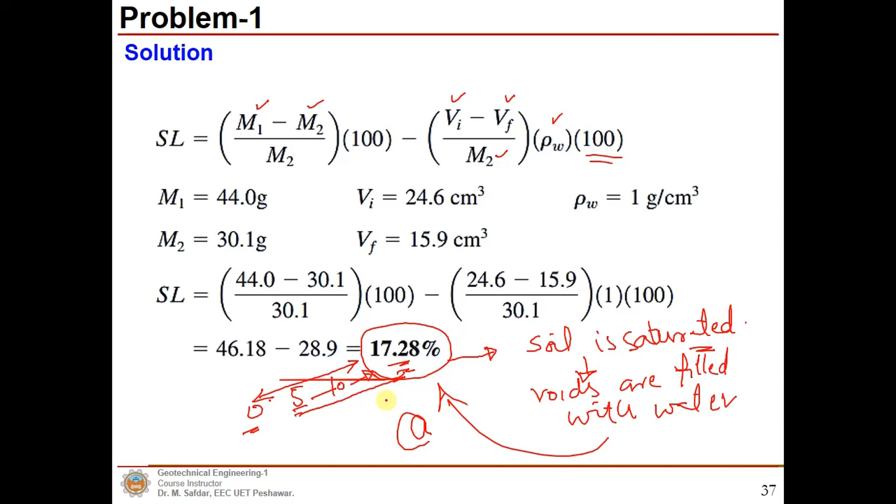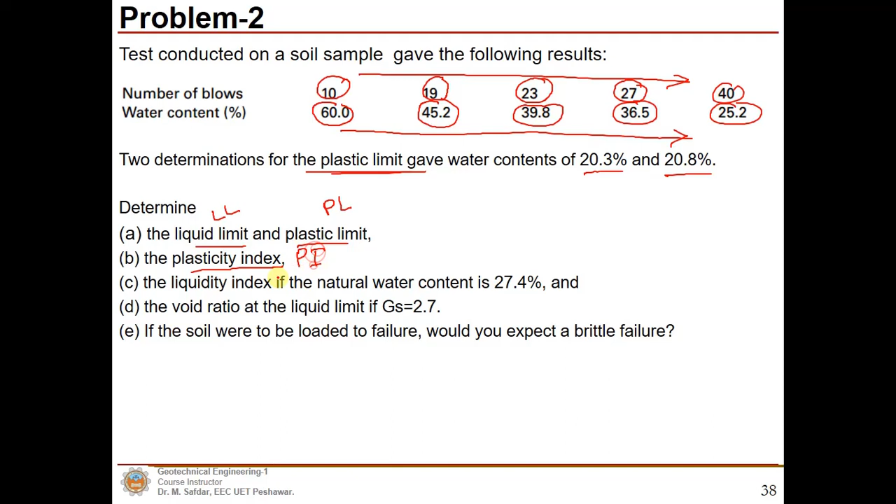Then plastic limit values are given as 20.3% and 20.8%. We need to determine the liquid limit and plastic limit, and the plasticity index. We need to find the liquidity index at a water content of 27.4%. We need to find the void ratio at the liquid limit, if GS, or specific gravity, is 2.7. We also need to determine: if the soil were to be loaded to failure, would you expect a brittle failure?

Starting with the liquid limit, we can draw this data in Excel on a graph. If we plot these points and find the corresponding water content for 25 number of blows on a logarithmic scale, with water content in percentage, we find that the liquid limit is equal to 38%.

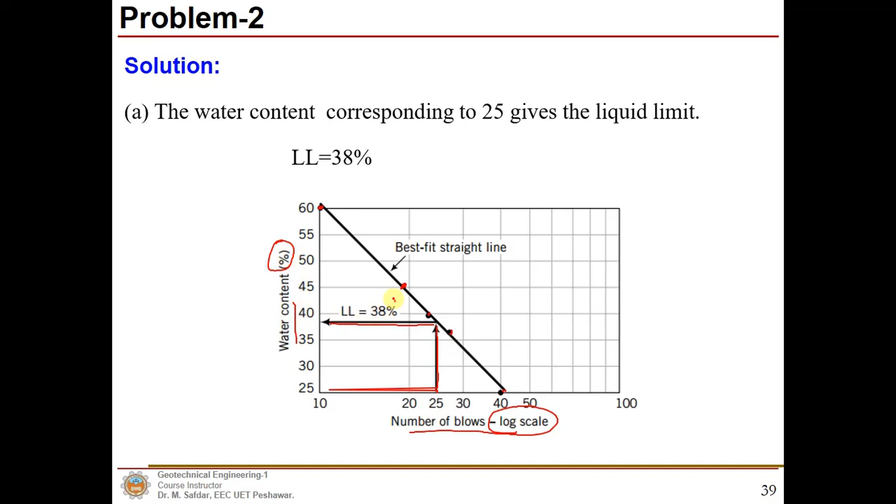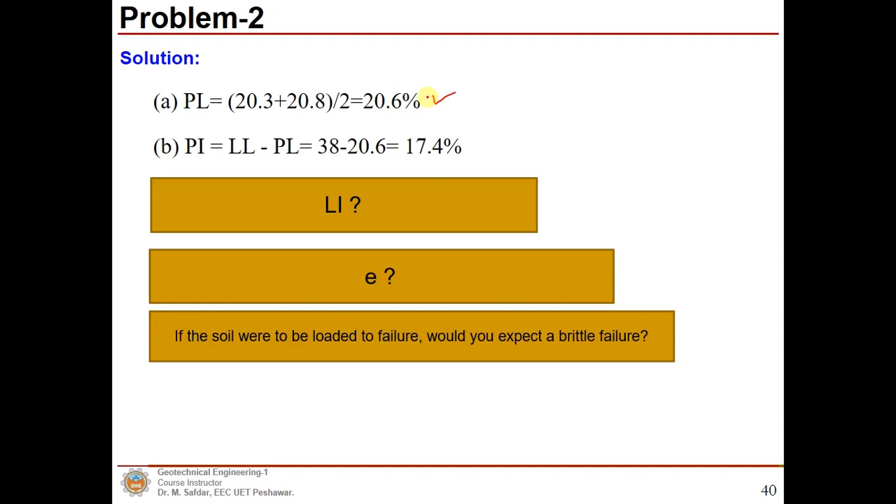So the plastic limit will be the average of the two values given in the problem statement: 20.6%. The plasticity index is equal to 17.4%, and the liquidity index is 0.39. The natural water content is 27.4%, the plastic limit is 20.6%, and the plasticity index is 17.4%.

Here we know the phase relationship, and we need to find the void ratio at the liquid limit. At the liquid limit, as our soil is saturated, we can take S equal to 1. So the void ratio E at liquid limit, with the water content at liquid limit, equals liquid limit times GS. The liquid limit is 38, so we use 38 into GS, which is 2.7. So the void ratio is 1.03.

The answer to whether, if the soil were loaded to failure, we would expect a brittle failure, is no. This is because if the liquidity index is between 0 and 1, we will have a plastic state. So we won't get brittle failure from this particular soil because the liquidity index is 0.39.